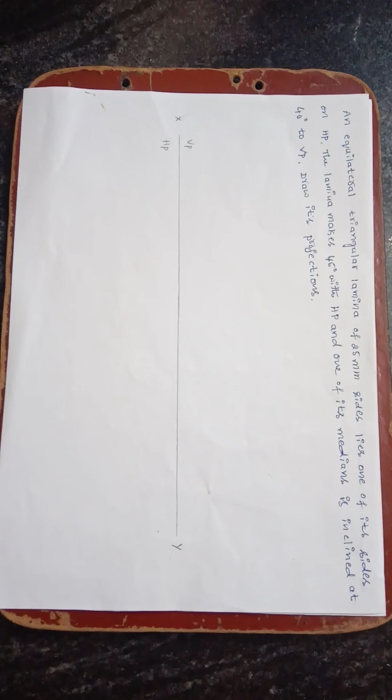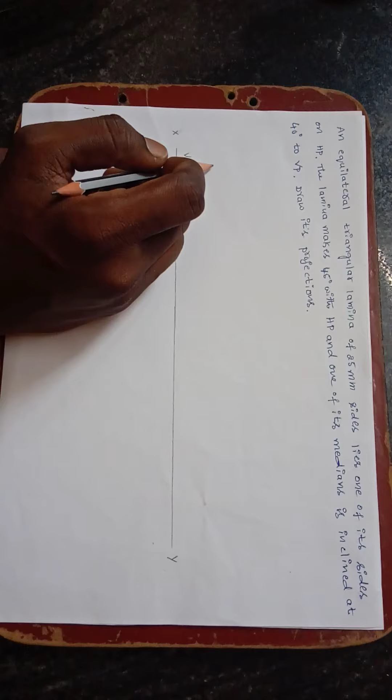In this video, I am going to explain projection of an equilateral triangular lamina. Take the question. An equilateral triangular lamina of 25 mm sides lies on one of its sides on HP, meaning it's resting on its side. The lamina makes 45 degrees with HP and one of its medians is inclined at 40 degrees to

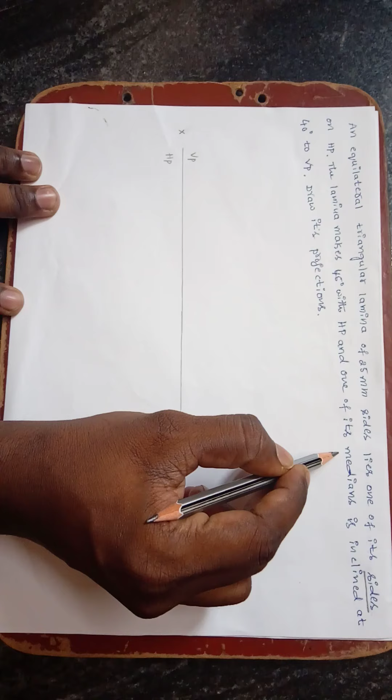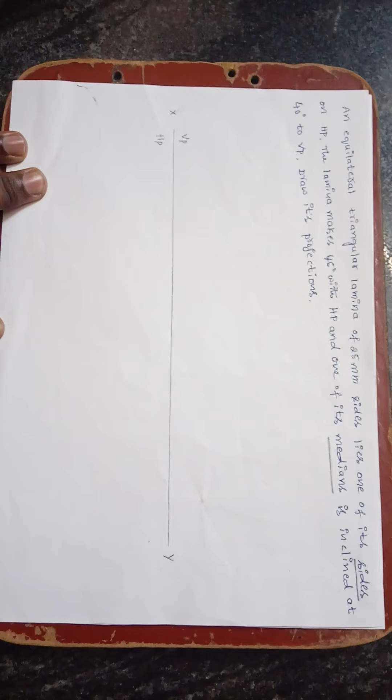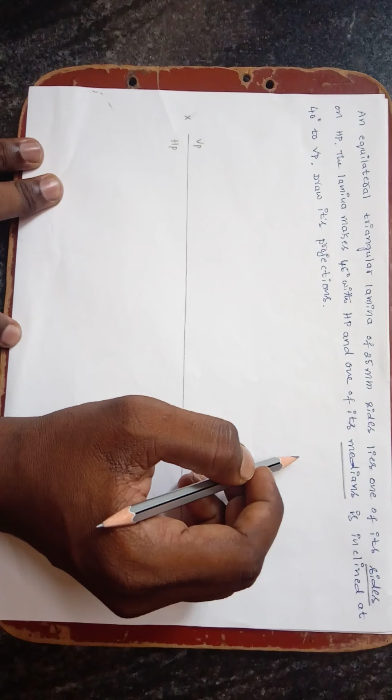VP. In this question, there is the word median, so we can follow the beta method to solve this problem. Draw its projection. Whenever the word median comes in the case of triangles, you have to follow the beta method in order to draw the triangle. In the first step, you have to construct a triangle.

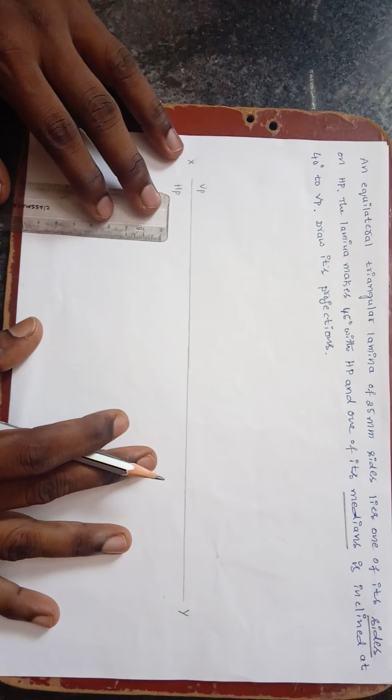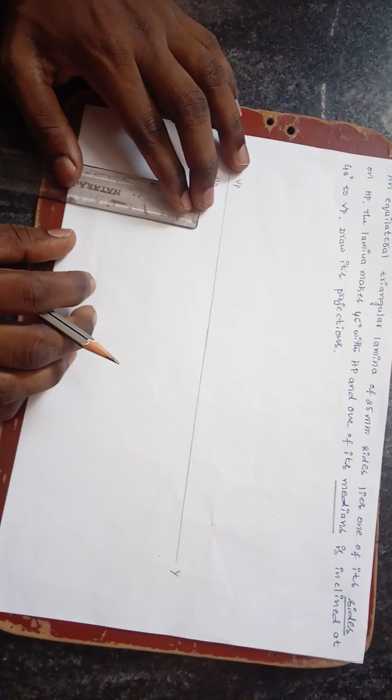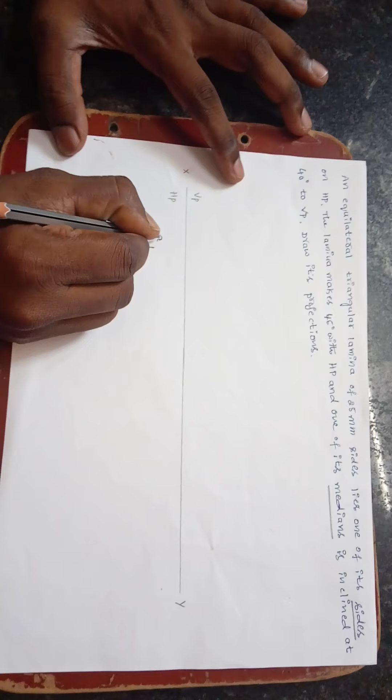The side of the triangle is given as 25. First, draw a 25 side. 1, 2, 2.5, 25. Mark this as A and this as B corners.

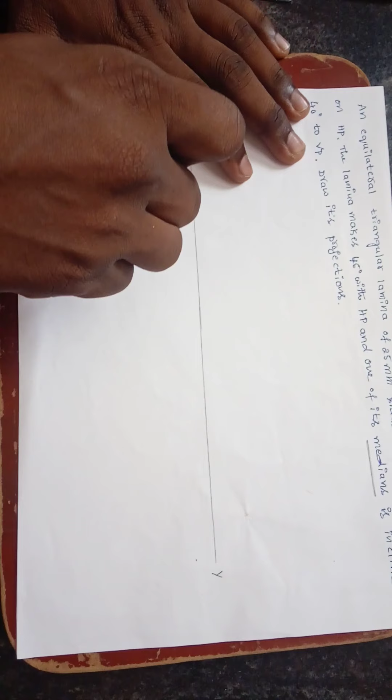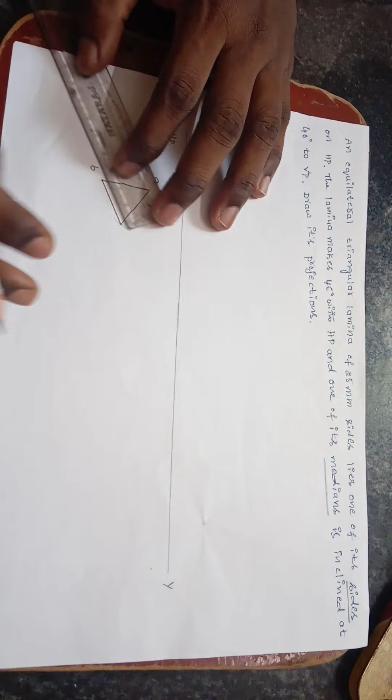Take the compass, measure from B to A, cut it, draw an arc. From corner A, draw one more arc. Where the two arcs cut, place one small reference point. From that point, draw a line up to B and up to A. These sides also should be 25. Now all the sides are 25. Mark this point as C. Now erase the extra unwanted lines.

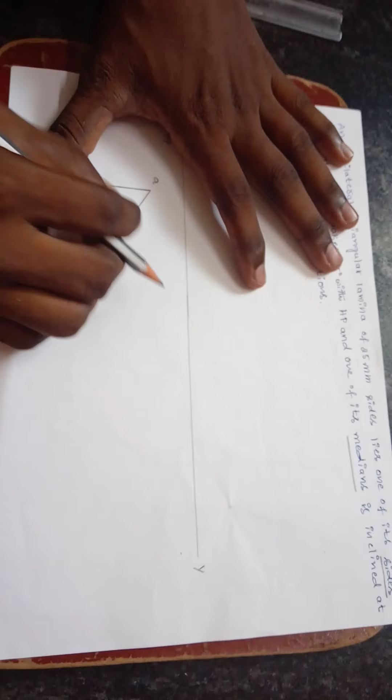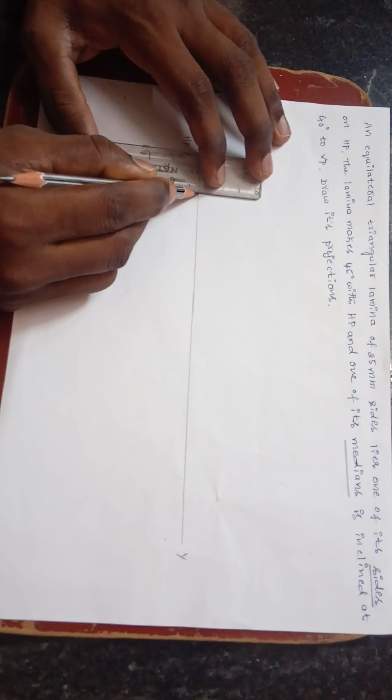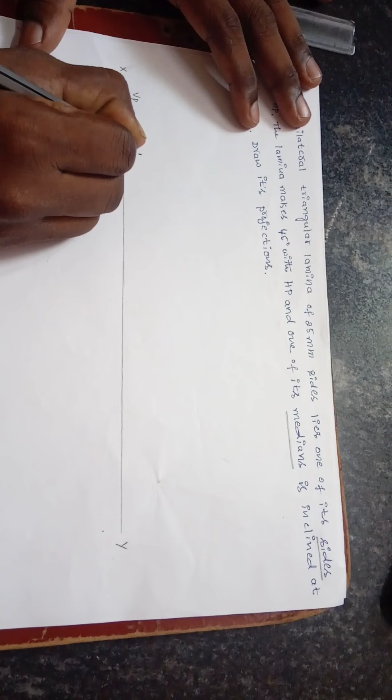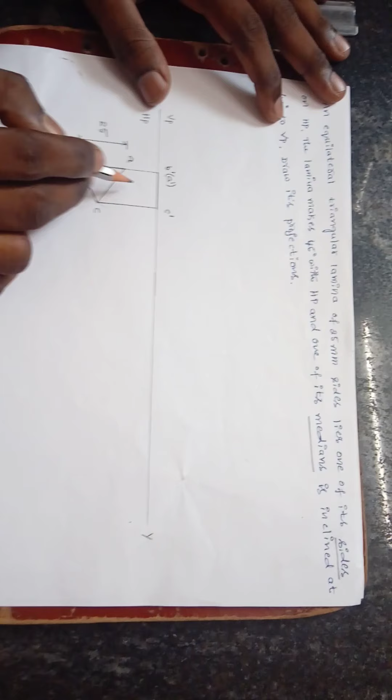The side of this triangle is 25. Then project the lines above to get its median. This is the median. When I look from this side, I am able to see only B and C. Since it is in top view, now I am going for front view. B becomes B dash, C becomes C dash. But what about A? When I look from this side, A is not visible. That's why I will keep it in brackets. In front view, it is seen as a line. In the top view, it is seen as a triangle.

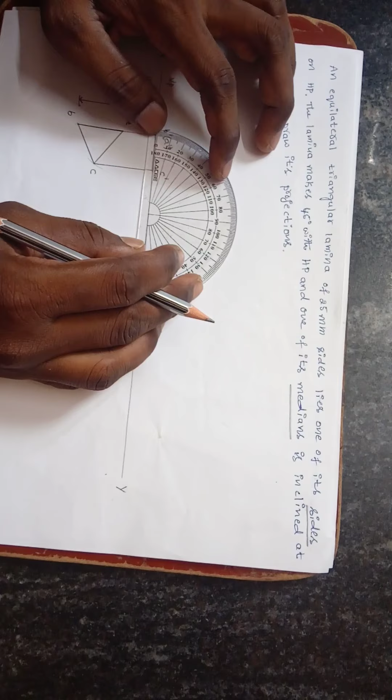While going for the second step, we are given two angles. One is 45 degrees, one is 40 degrees. Presently, we are in VP. In VP, you have to take the HP angle. What HP angle is given? 45 degrees. Place one small reference point. From that point, since it is in VP, I am taking 45 degrees of HP. 0, 10, 20, 30, 40, 45. Mark the point. Simply draw a thin line up to some length.

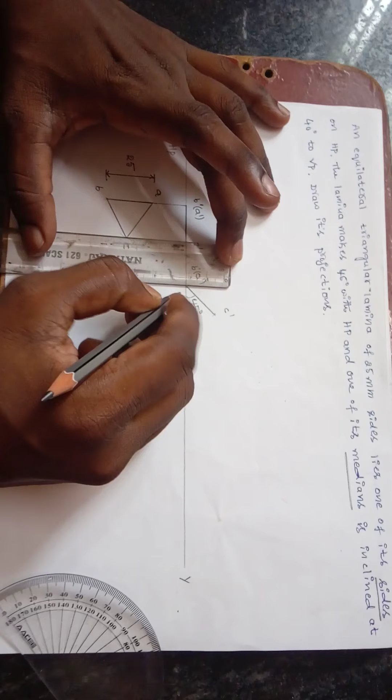Then take this median, cut it up to here, and erase the extra length of the line, then make this line thick; this length is the same. This point is B dash, this point is A dash, this point is C dash. The angle is 45 degrees. Then, looking from above, draw the projection lines below in order to get the figure in top view. Draw a very thin projection line.

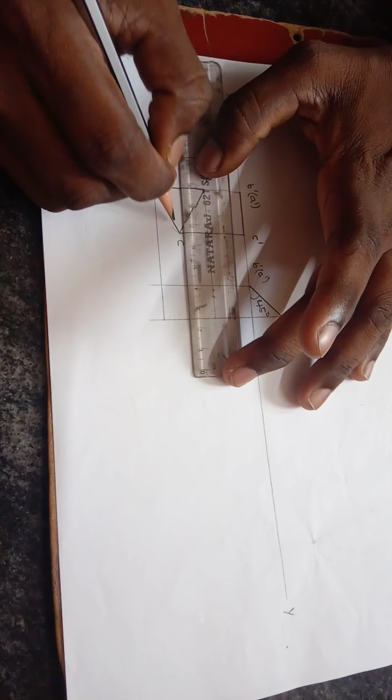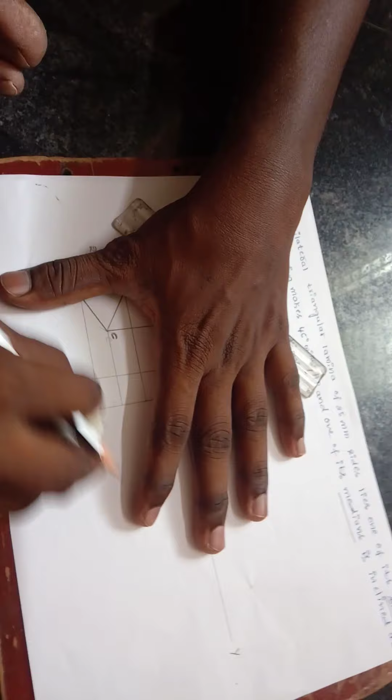Now we have to draw the top view. One more. From here, this point is C. Now remove the extra unwanted lines. Now I want to find the shape of this, so I want to intersect these horizontal lines and vertical lines. I will take the line coming from A, where it will intersect with the A dash line. This is the A dash line, this is the A line. It is intersecting here, so this point is named A.

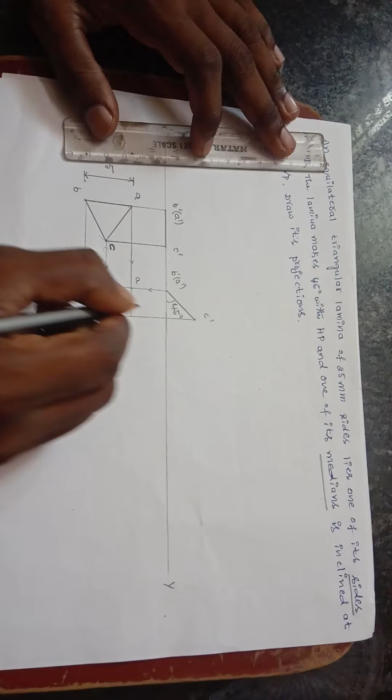Similarly, this is the B line. You want to search for the B dash line. This is the B dash line. It is intersecting here, so this point is B. This is the C and C dash line. It is intersecting here: C. So here also I am getting a triangle.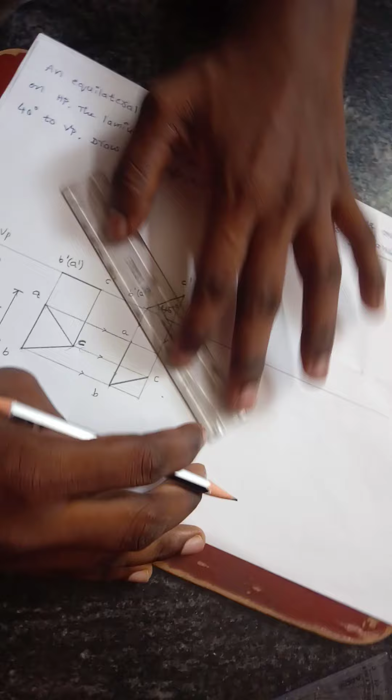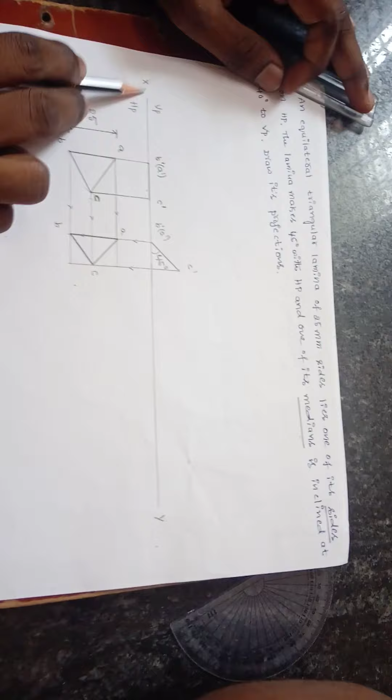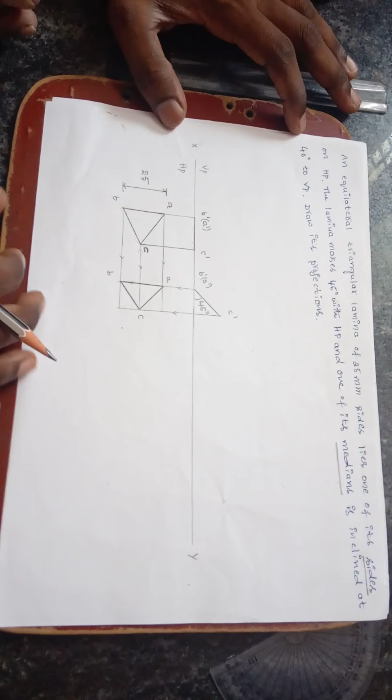In the second step also I am getting a triangle, but this median is decreased compared to the first step, because this median is inclined at 0 degrees to the xy line, but this median is inclined at 45 degrees to the xy line. This is the true triangle, this is the apparent triangle. In the beta method, you have to measure both medians. This is the true median, this is the apparent median.

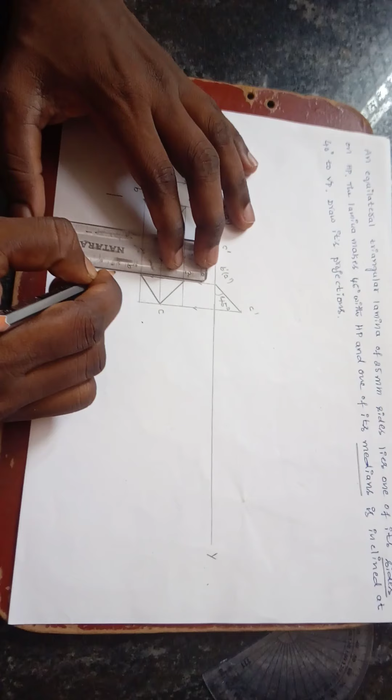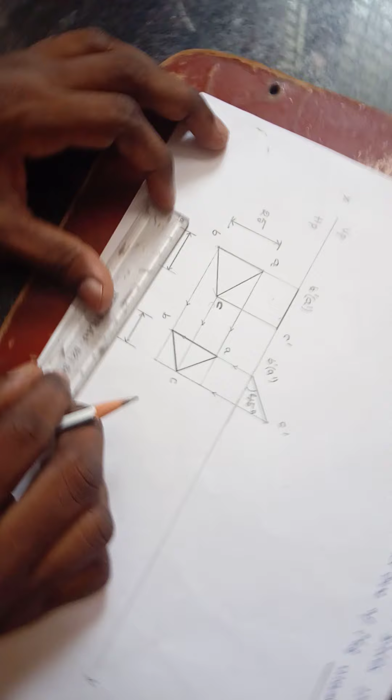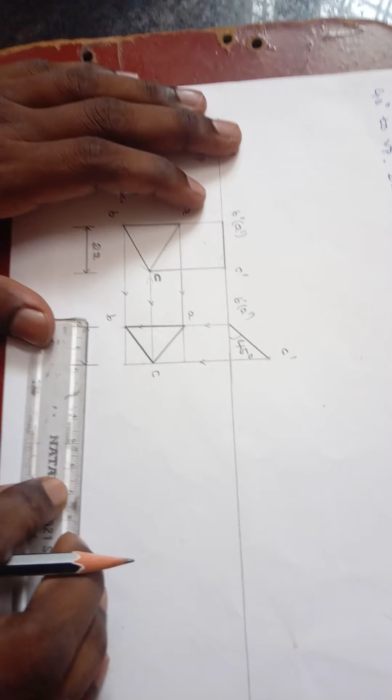You can measure how much true median you are getting. Approximately 22 mm you are getting approximately true median. What about apparent median? I am getting 1.7, means 17 mm I am getting apparent median approximately.

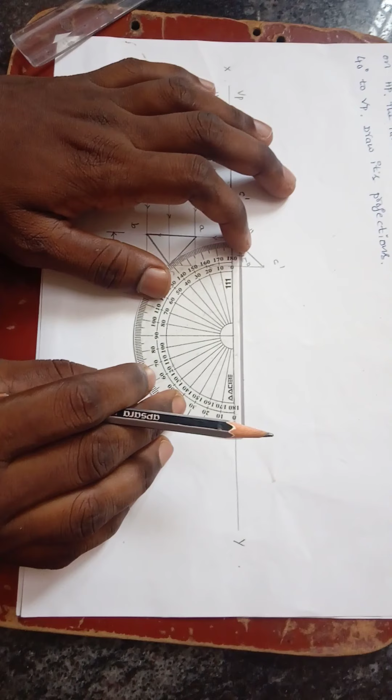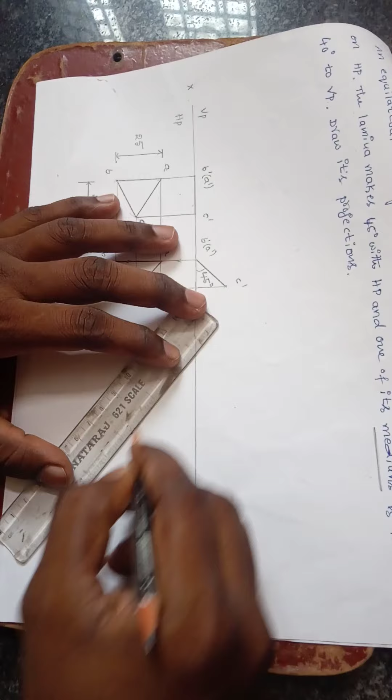Now second angle is 40 degree. Draw a line from this point, 40 degree. Since we are in HP, we have to take VP angle 40 degree. Place the protractor like this, then measure from this side how much 40 degree. 0, 10, 20, 30, 40. Draw a line, some length of a line. It is inclined at an angle 40 degree to xy line.

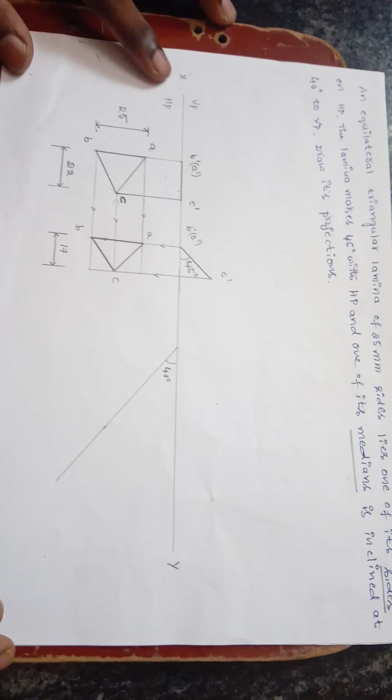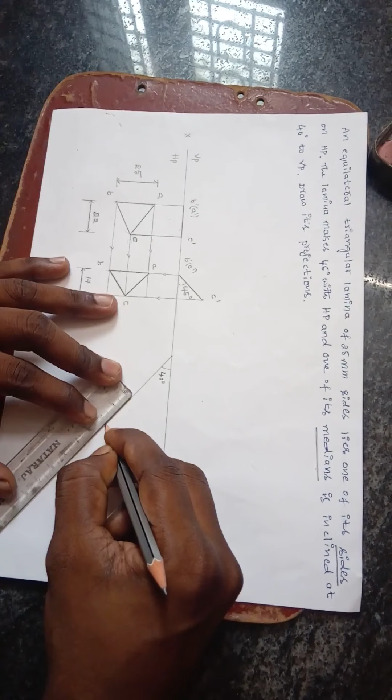Now this is a special, means a beta type problem. You have to consider this true median and apparent median. Initially I will draw the true median of length 22 mm, 22 mm on the 40 degree line, 10 mm, 20 mm, 22 mm approximately. Then at the end of this line, draw a locus, means chain line.

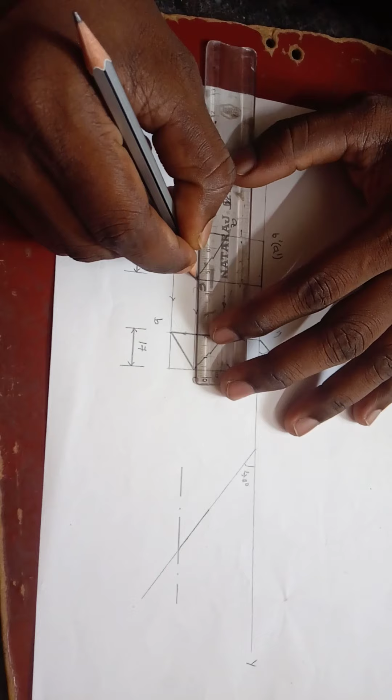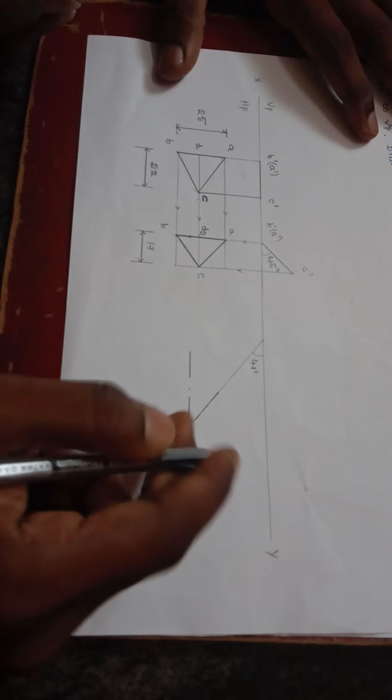Now in this beta problem we had to show two more extra text. This is d1, this is from c up to point, this is d2. C to d1 true median, c to d2 apparent median. Now I drawn like this. This is d1, this is c point. Now I have to place this triangle like this. Okay, perpendicular to this. Oh, true median is over.

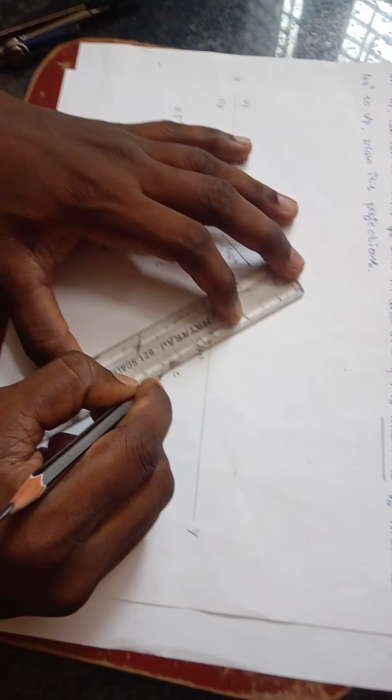Now I want to take apparent median. I will take the apparent median length. This is 17 mm by using compass. Now I will cut it on this line. You have to take near to this point, not like this. You have to cut near to intersection point. The point is cutting on the locus in this point. Draw a line up to this point. You can extend up to xy line, right?

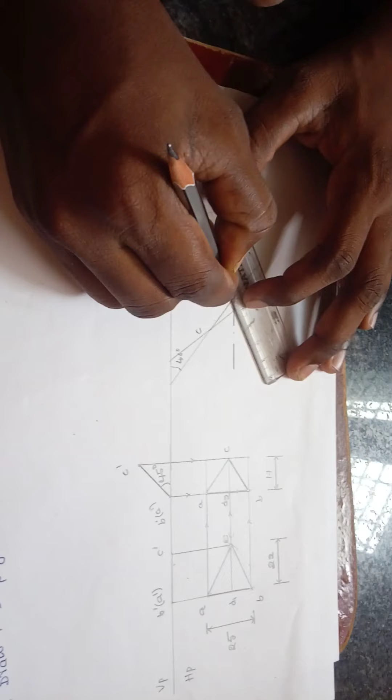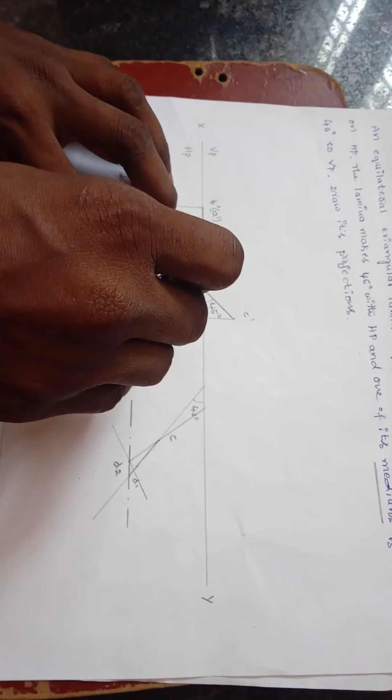Now draw a line, some length of a line perpendicular to this line. Make the scale of this line parallel to, means collinear to this line. From this point draw some length of a line. Now take a compass. This is a triangle. I had to keep like this. Now this point is d2. Now I will measure d2 up to a. I'm taking this point. This distance and this distance are almost the same. Now from d2 cut one arc, one more arc. Since the distance from here to here almost same, now I got this point and this point.

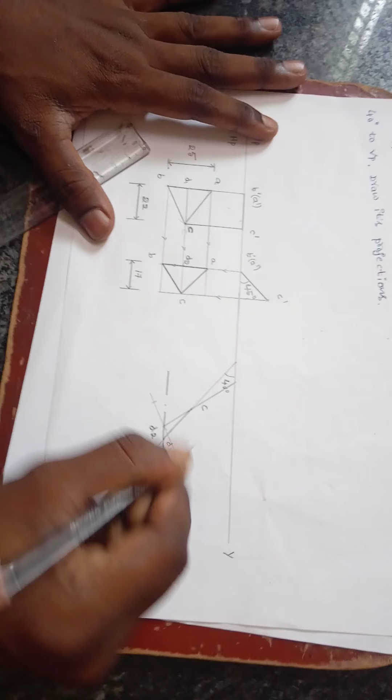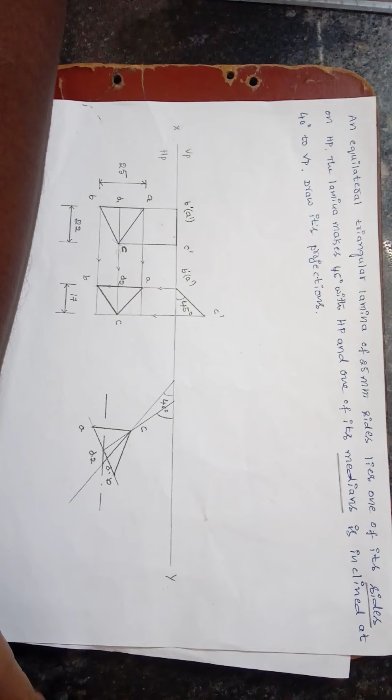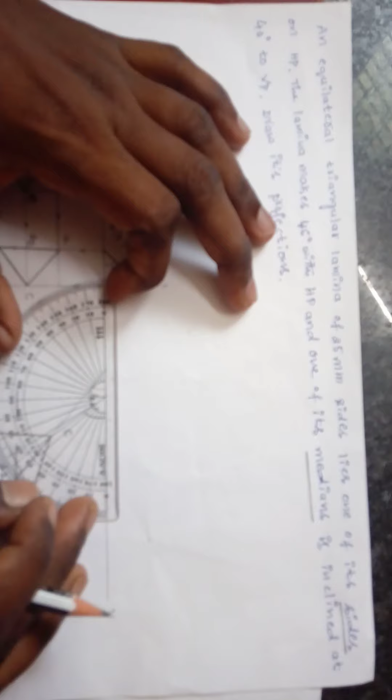This is C. When I kept like this, it will become B and it will become A. Now I will join up to C, and from C up to B, and connect the base AB. This is the beta angle you have to find. Now I will measure how much beta angle I got. Place a protractor like this. The line is coming from this point up to here. Almost this point is coming here. 55 beta angle I am getting here.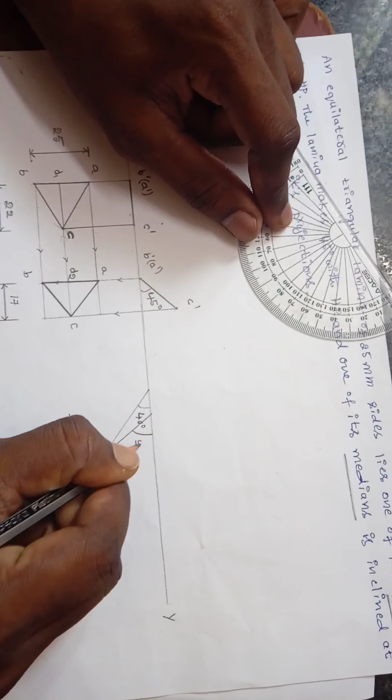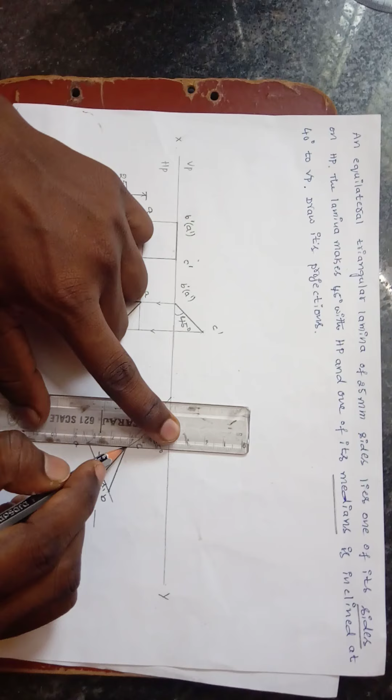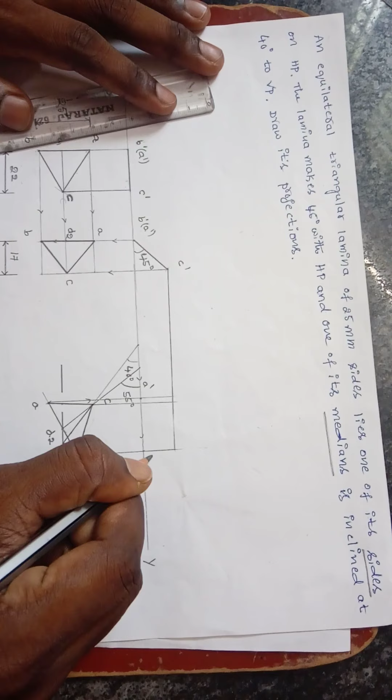55. Now I will extend the lines above from every corner, but you have to do exactly while you are drawing in the sheet. I'm drawing approximately, a little bit fast. Remove the extra length of the lines. Now this line represents A. Search for A dash. This is A dash. Now this is B. Search for B dash. This line represents B dash. This is B dash. This is C dash.